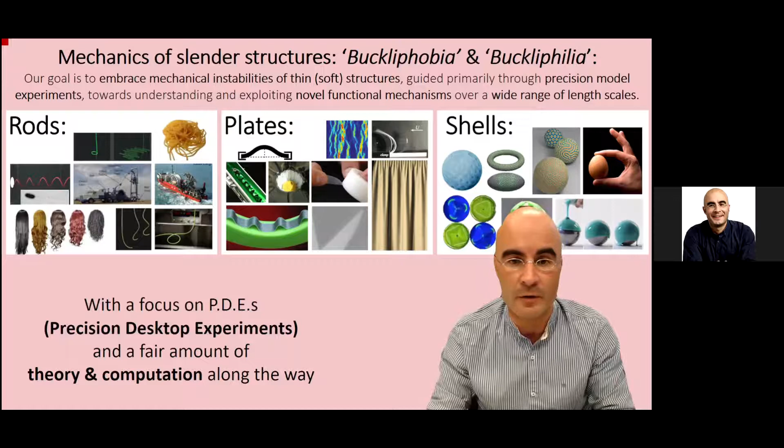Okay, so next, realizing I'm running a bit out of time, let me give you three very quick pointers of other problems that we won't talk about today.

Over the past few years, we've gotten very interested in magnetoelastic structures, structures that make use of the coupling between elasticity and magnetism. Many different kinds of problems we've looked at in this respect. Here I'm showing an example of an actuated helical structure by the application of a constant gradient field that induces internal forces into this rod.

Another example, perhaps closer to applications, is a recent paper we had out on programmable metamaterials with stable memory, where we make use of bistability of shells and magnetic actuation to arrive at those systems.

Closer to engineering, we're very interested in how shells buckle. If you have a thin shell like a fuel tank or a radome, and you ask, given a certain load, when do they buckle? That's actually a very difficult question to predict because these systems are strongly sensitive to imperfections, so we've been focusing extensively on the role of imperfections in these systems.

I also like fluid mechanics very much, even though our emphasis is mostly on solids and structures. We do a fair amount of work on fluid structure interaction, especially in the context of flight, considering the structural aspects of flexible foils and wings in aerodynamic performance.

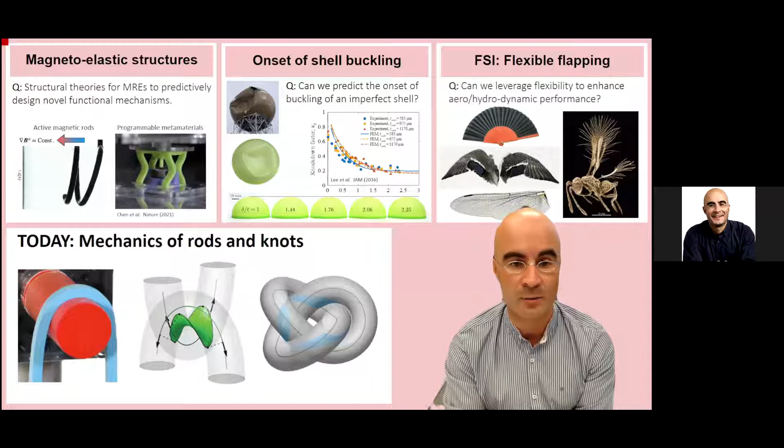Okay, maybe last slide of context. Why do we care about knots? Well, first of all, because it's a very challenging problem, and I do have a comment on what are the fundamental challenges in this class of systems, but they really matter.

But you might ask, well, we use them, who cares? A lot of the knowledge we have developed for these systems is primarily empirical. People have been using knots and ropes for millennia, and so we just know the do's and don'ts for these kinds of systems. But coming up with predictive models of the kind of work that you all do is a fair amount more challenging. So why do we care?

Well, they are very important for sailing, for climbing, for textiles, for belt-driven machines. And a primary drive that we are actively working on, by interacting with surgeons, is also the mechanics of sutures and surgical knots, and being able to come up with predictive models to inform assisted robots in semi-autonomous procedures. This is actually central to the PhD thesis of Paul Johanns.

And next, Paul. Okay, so maybe last slide before we get to fundamental challenges. There are really three primary ingredients that make these problems very challenging. The first is buckling. Buckling is an instability that happens when a thin structure is

loaded by a compressive load. As I was saying earlier, predicting the critical buckling conditions goes back to the days of Euler in 1744, with his famous paper on elastica. And the problems that happen past these critical buckling conditions are reconfigurations that are strongly geometrically nonlinear.

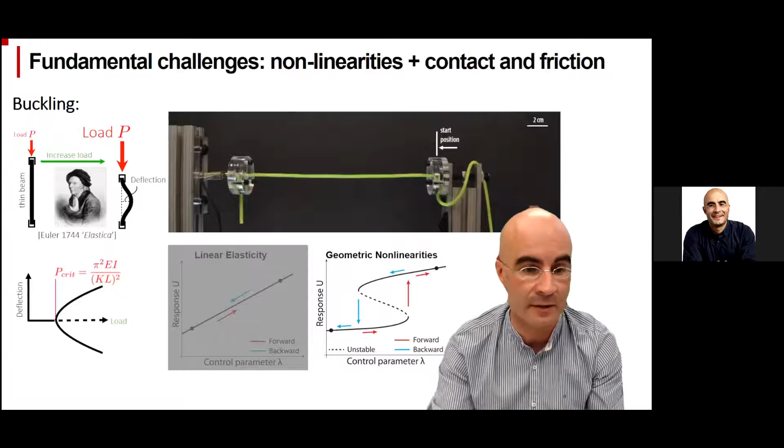Now, if you place this rod under compression, and perhaps add a little bit of twist, then you have buckling. But not only that, you can have multi-stability, coexistence of solutions with subcritical bifurcations. This is really caused by the underlying nonlinear geometry. These are the kind of things that really call for the full toolbox of nonlinear dynamics and nonlinear physics to describe these systems.

In addition to these geometrical nonlinearities, in many systems that involve rods, we have to deal with contact. Even without friction, that's already a strong hard nonlinearity. It's important to consider contact and friction, and even taking simple Coulomb friction, when you couple it with contact and geometrical nonlinearities, it becomes a full kitchen sink of nonlinearities that we have to deal with.

And when we have nonlinearities in this class of systems, unexpected things happen. That's why experiments are very important for us, because they allow us to jump into that jungle of unknown nonlinearities and uncover mechanisms that we then try to rationalize. So again, experiments take a primary role in setting the line of research.

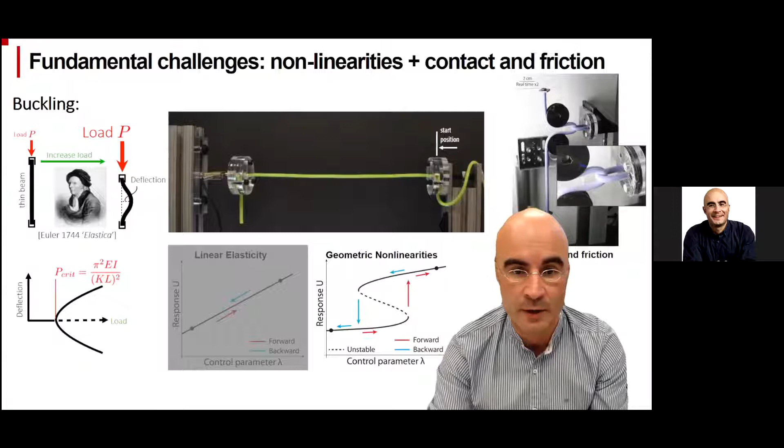Okay, so blah blah blah out of the way, let's get to the bulk of what we want to tell you about today. If you move on to the next slide, specifically on these rod-like systems, if we have a knot—maybe go back to the previous slide, Paul.

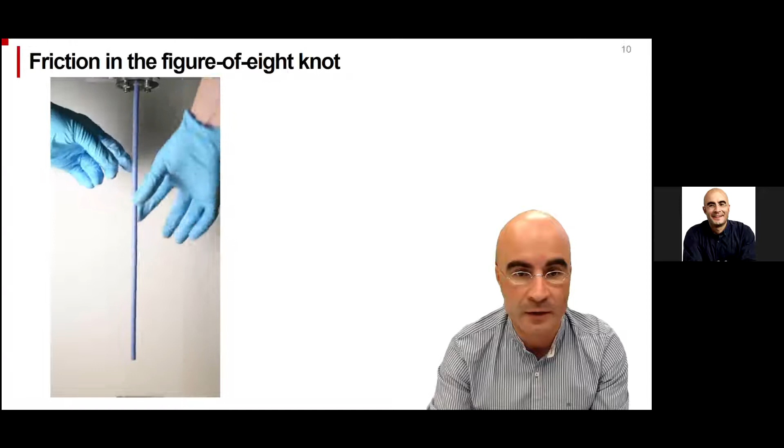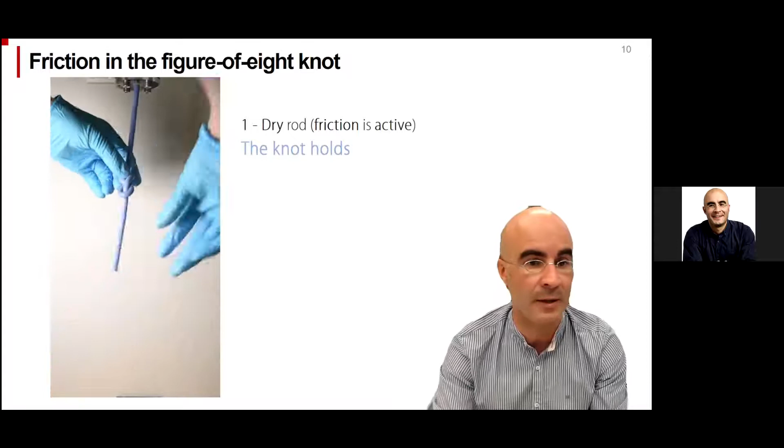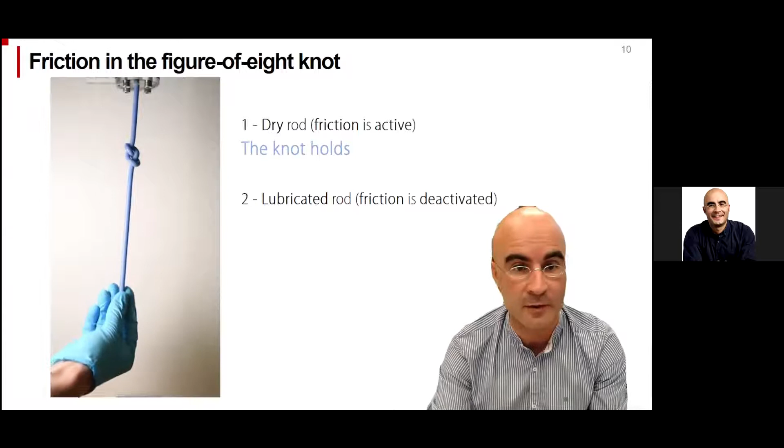If you have a knot that you tie and it holds because of friction—in these systems, I want to highlight with this video that Paul Grandgeorge produced that friction is crucial. Here, of course, the rod would like to be straight because that minimizes bending and gravitational energy, and friction induces resistive forces that prevent that. Now, if you lubricate this very same rod with the very same figure-8 knot, friction does not do the job it needs to do, and essentially the knot becomes undone because, again, that's the minimum energy state. These are the kind of ingredients we'll be dealing with for the rest of this talk.

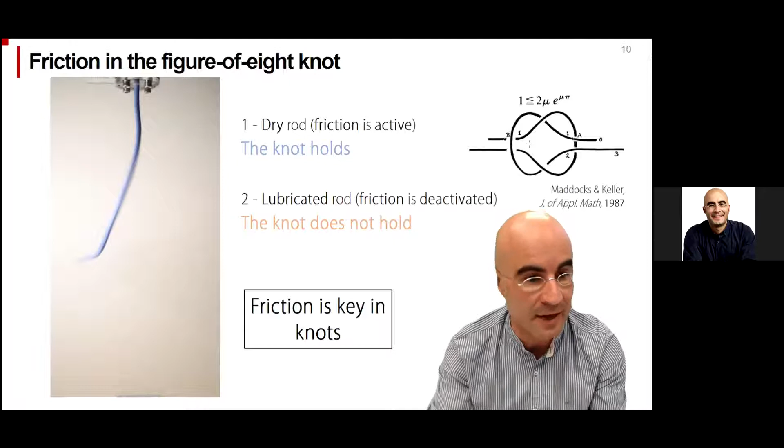So friction is key. Okay, very quickly, we want to highlight three specific projects today. First, the classic elastic capstan that Grandgeorge will modify in ways that were not really understood previously in the literature. And if you're not familiar with the capstan problem, Paul will give a brief introduction.

Then we'll ask, well, instead of having a rod wrapped around the rigid cylinder, what if the other element it's wrapped around is also flexible with tight curvatures? A very exciting study that we completed recently. We'll find that geometry is central to that problem. And then we'll actually go back to the applied math.

And knots community and ask how robust are some of these geometric arguments in real physical systems. Johanns will be covering some of that towards the end of the talk. So Grandgeorge, all yours now.

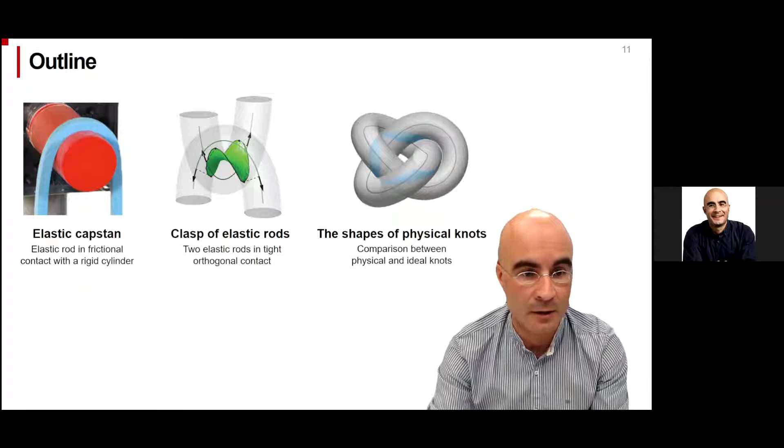Cool, thanks. Okay, so I will tell you a bit about this capstan problem that Pedro introduced in the elastic case. So maybe some of you, as a sailing country, as Portugal, you know a bit of the capstan problem because it's related to ropes and sailing in general.

So typically, the capstan problem is if you have a rope that is tied around a cylinder like this, the question is, what is the tension that you can apply at this end as a function of some lower tension that you're actually applying to the other end?

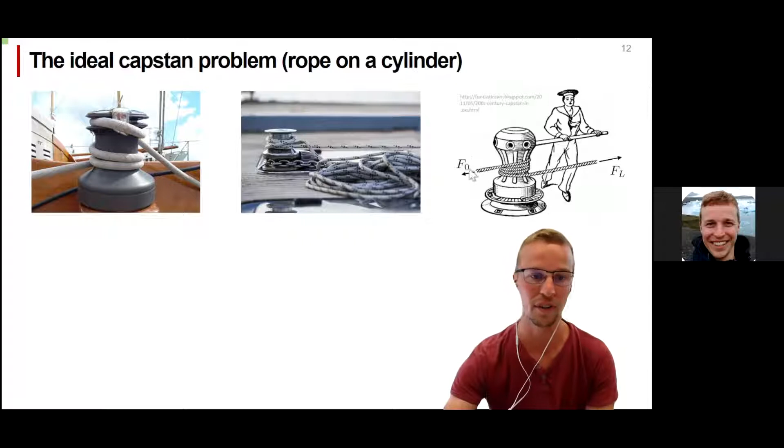And maybe a good representation of this is here. This is actually a capstan that allows you to wind the rope around the rigid cylinder. And again, the question is, well, what is the higher force as a function of the lower force that you're applying to the rope? And this is not only applicable to sailing, it's also for driving mechanisms.

Where you have a driving pulley that is through a belt generating motion to a driven pulley. And here again, you have a low force here and a high force here. And well, the big question is from a theory point of view in this kind of system, what is the ratio between these two forces?

And actually, if you take the limit of a perfectly flexible belt with no thickness, you find a straightforward relation between the ratio. So for the ratio of two forces, which is given by this exponential here of the friction coefficient times the wrapping angle around the cylinder here.

So here again, you have to take into account that there is sliding and you're asking what is the ratio of the forces. So we might think, well, this problem seems pretty well put and already solved from a theory point of view. But of course, there are assumptions to this that are, well, perfect flexibility and no cross-sectional thickness.

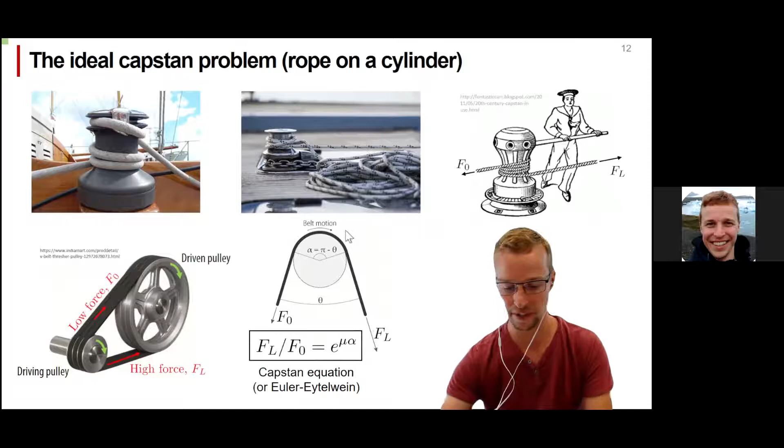So we thought, okay, but in real systems, well, the ropes, they might have some rigidity to bending. They might have some thickness compared to the cylinder of the radius. So the theory might not hold entirely. So we thought, okay, let's design a system where we can actually measure the ratio of the force.

We have a rod here that's made out of a very elastic polymer and is wrapped around a rigid cylinder. We hang a mass here that will be this dead load, so the small force. And then as we pull the cylinder up, as you'll see in a minute, we will measure the force that is being applied at the other end. So really, we're probing what is the load transmission along a rod when it's sliding in frictional contact with this rigid cylinder.

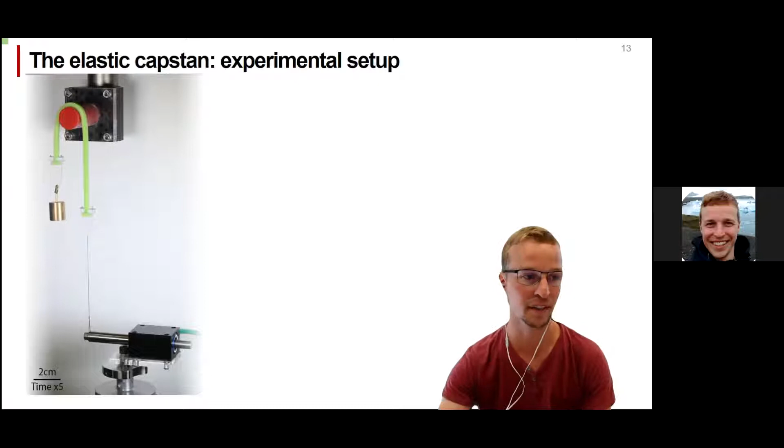So you saw the video, and this is the type of force curve that we obtain, so force versus displacement. And you see here, well, this is actually the low force that I'm applying, and this plateau force here, as soon as sliding is happening, well, this is the higher force. And you see, well, they're not equal because friction is generating tension increase.

And actually, we can represent this ratio here that I'm interested in, the higher force divided by the lower force, as a function of the loading on the system. So let's say the lower force that is here normalized by the typical axial stiffness of the rod. And we can do this for several dead loads, and we obtain actually a complete curve that tells us how the system transmits the load as a function of how much it is loaded by this dead load, F0.

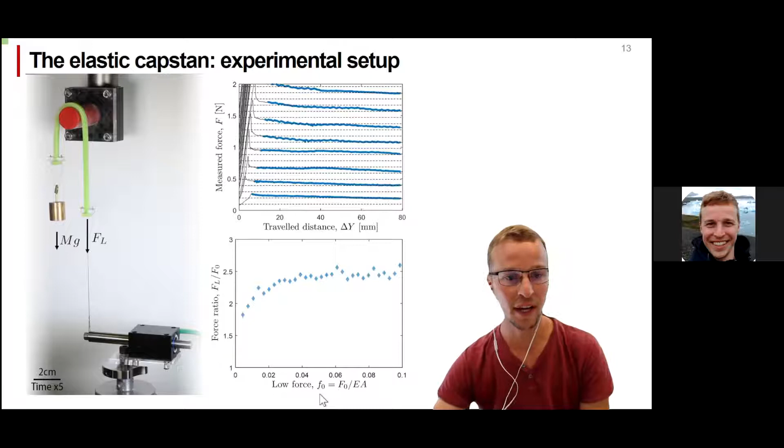Okay, and so, of course, we directly want to compare this with what finite element method would tell us. So here, I'm just going to show you a quick video of how we can do this with finite element.

So this is actually, the computations have already been performed, and you see here there is a cylinder and a rod wrapped around it. And actually what I'm doing now is I'm rotating this cylinder in this direction. And so you see that there is some frictional, you don't see it, but there is some frictional interaction here.

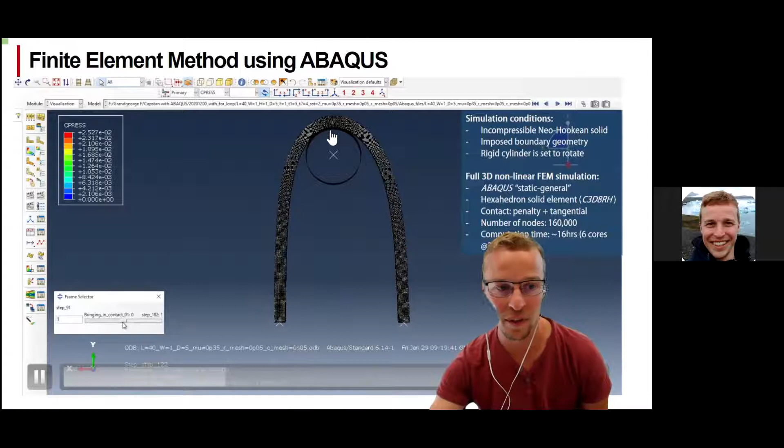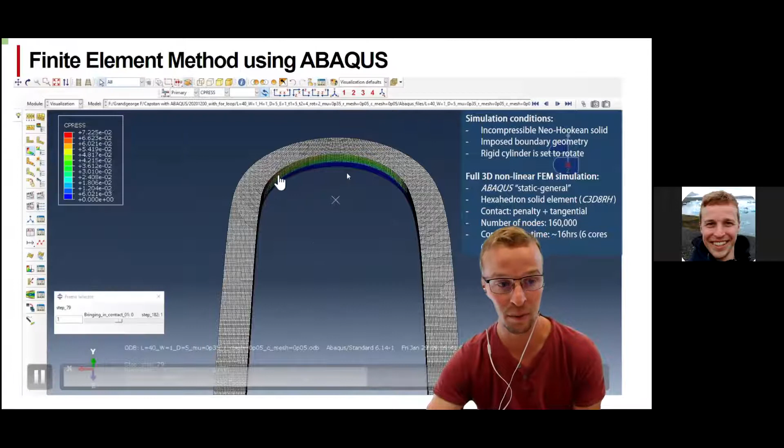The question is, how does the force transmit through the rod? Everything is dictated by the contact region. What we're surprised to see is that if you look at the contact pressure between the rod and the cylinder, it is strongly inhomogeneous. There are some regions of higher pressure, at the entrance of contact, there's much more pressure at this location than somewhere else. So even though the system looks rather simple, it shows some non-trivial behavior locally.

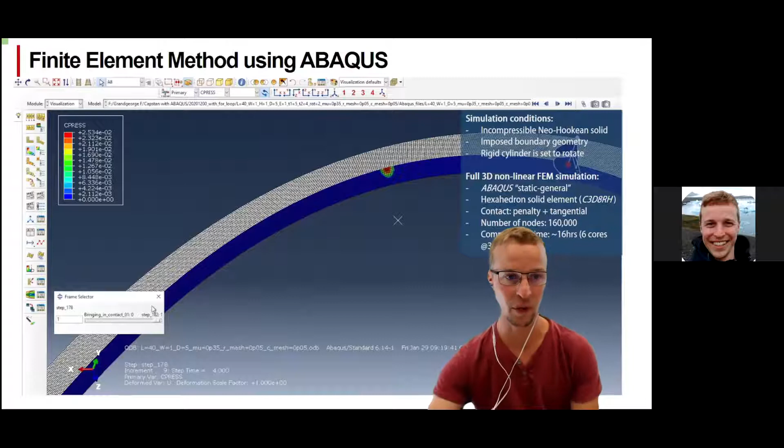We can do this for d equal 10, for a smaller cylinder d equal 5, and we can go even smaller, down to where the thickness of the rod is equal to the diameter of the rigid cylinder. There is a theory existing for this, the classical Capstan analysis, the classic Capstan equation, which has some assumptions underlying it.

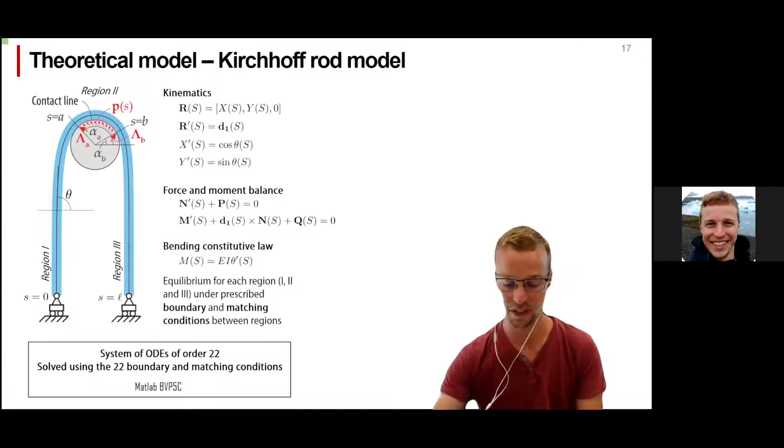We wrote the equations related to kinematics. We apply a force and moment balance locally at each location of the rod, then use a constitutive bending law that relates the moment inside the rod as a function of its local curvature, theta prime here. If we do this, we end up with a big system of ordinary differential equations that we can solve using the MATLAB function BVP5C, which is actually very robust.

So we get this purely theoretical curve, with no adjustable parameters, and we can compare this with the FEM results I showed earlier, where we also quantify tension along the rod. You see that theory does a fairly good job at predicting what FEM actually tells us is happening exactly.

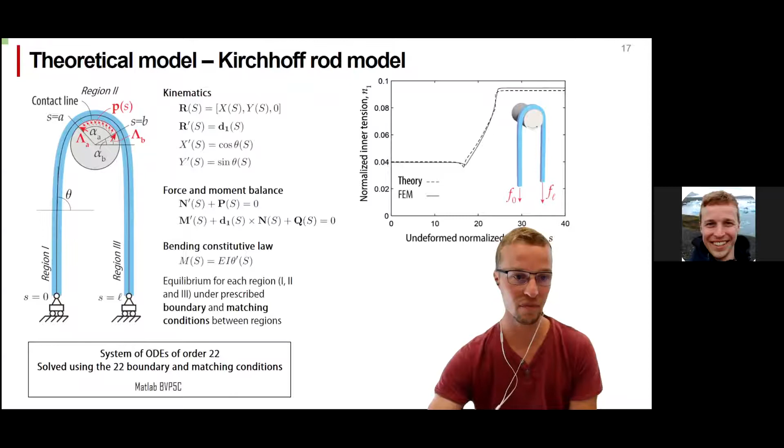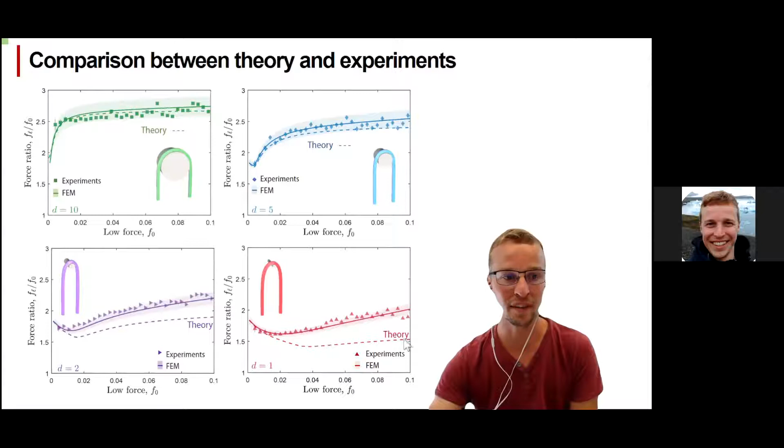Quick summary: theory is satisfactory for large enough cylinder diameters, because curvatures are not that extreme there. But theory is limited for smaller cylinders, as the induced curvature creates finite strains that are no longer within the elasticity theory of the Kirchhoff rod theory.

So, good in some regimes, not so good in others. In the region where the thickness of the rod is of the same order as the thickness of the cylinder, this is actually very relevant to knots, because knots are nothing but an entanglement of rods in contact with one another, so curvatures are pretty extreme. This is what we'll move on to next: how can we describe the mechanics of knots when curvatures are that extreme?

For this, I will let Paul Johanns tell us about his beautiful shoe here. There's a lot of interesting things to say here. Right, thank you so much.

So yeah, indeed, this is the classic square knot, the classic knot you would do in your shoelaces. What you can see is that this is a very tight knot. What does a tight knot actually mean? Well, the diameter of the filament and the characteristic radius of curvature are of the same order of magnitude, so existing theoretical models would not work anymore for these tight configurations.

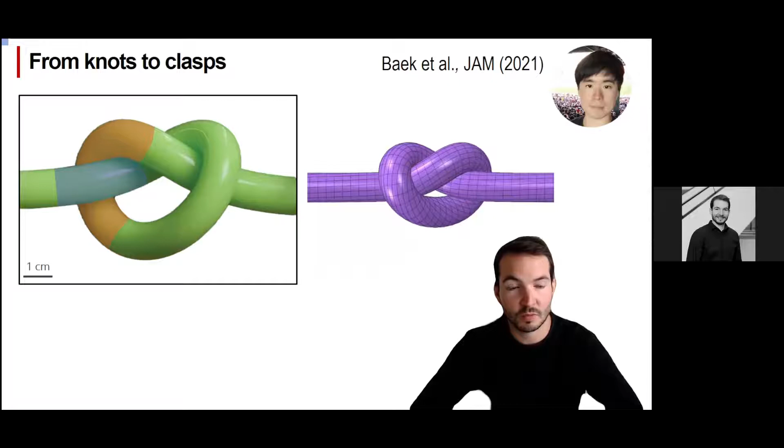This is actually something where we can break the knots down and make the problem hopefully a bit easier. This leads us then to the next main chapter, where we will talk about the clasp of elastic rods.

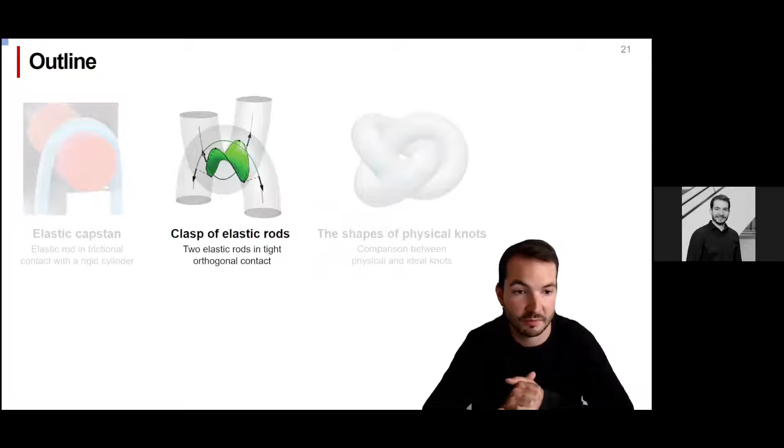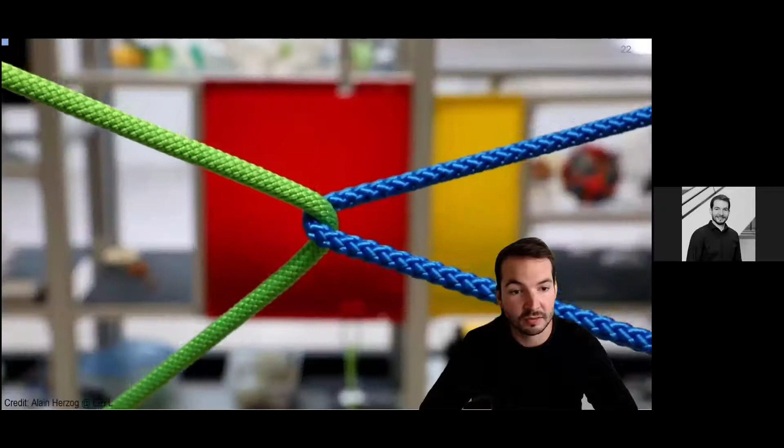We call this a clasp when we have two elastic rods that are in tight orthogonal contact. The system is actually quite easy, or looks very easy: you have two rods, two ropes, two filaments in tight contact with a certain opening angle. But now we will look a bit closer, and we will see some very surprising facts about this.

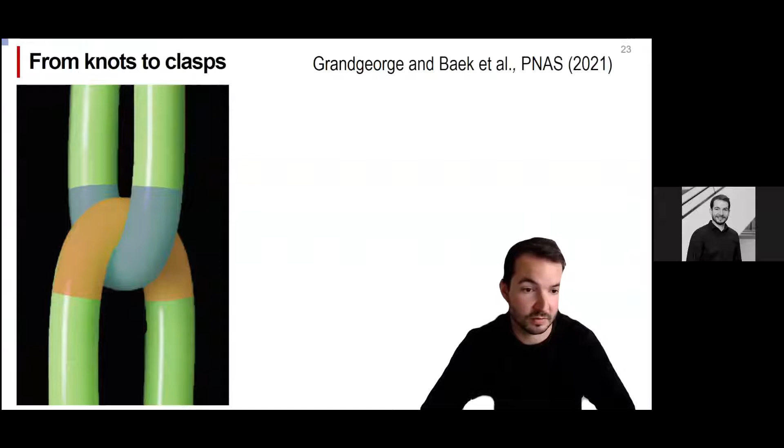So what is a clasp? Well, you have it here on the left-hand side. It's a model system of two rods that are crossed orthogonally, and we use hyperelastic material—these elastomeric silicon polymers. What we impose is a rod length, diameter, boundary conditions, and we'll also make it slide and measure the friction. This was detailed very recently in the paper by Grandgeorge and Baek et al.

We'll go now through the main points of this. So the main goal is to characterize, or get some understanding about, the contact mechanics and the load transmission for these orthogonal clasps with friction involved.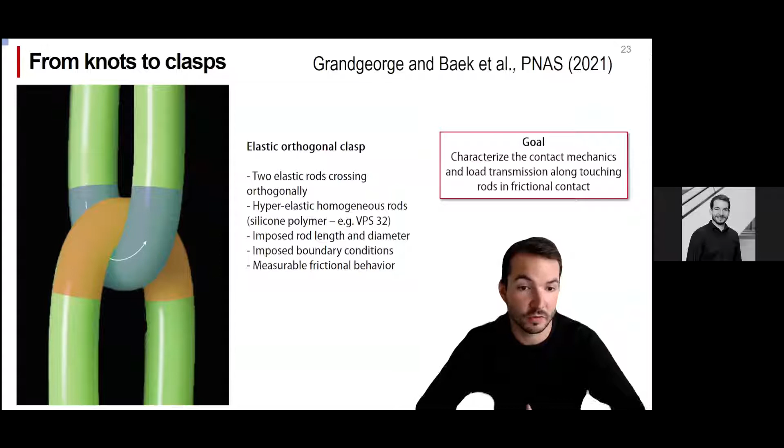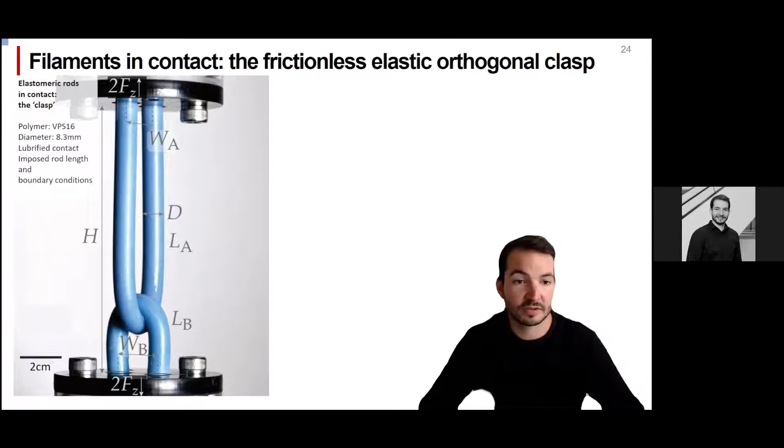So here again, the model system—you can see various parameters that we could change. What we are most interested in is the contact region, where the two rods are touching, but obviously we do not have direct sight on it. So we would need non-destructive volumetric imaging to get access to it, and we actually do that with our micro-CT, which stands for microcomputed X-ray tomography.

You can see here a volumetric image of this clasp configuration. It's still just seen from the outside, and in a moment we'll go see what the contact region looks like.

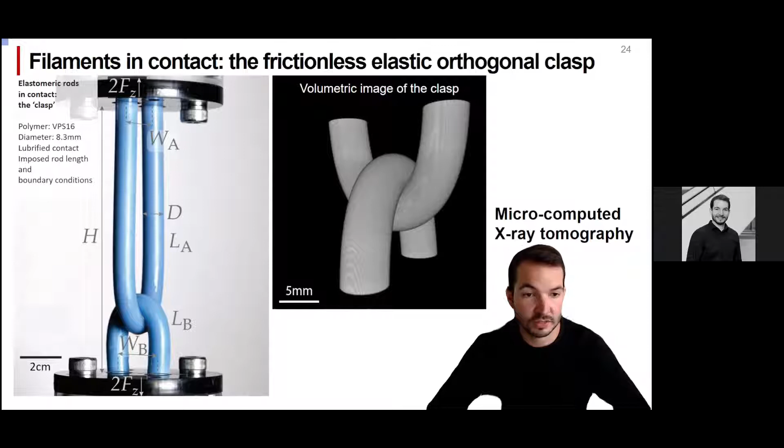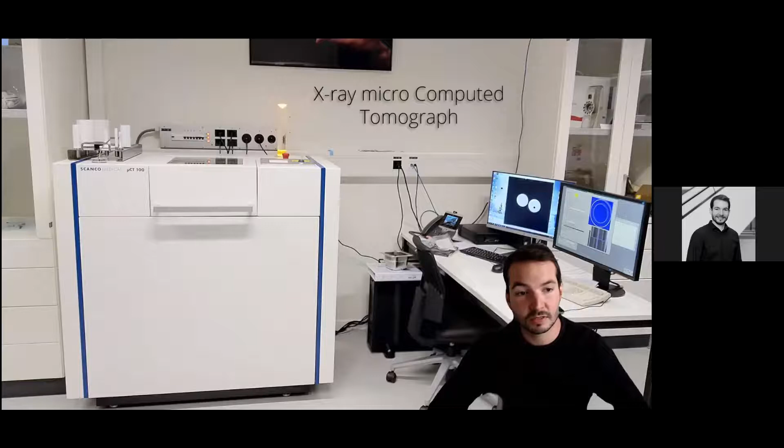But before that, let's go to the imaging lab, and I will show you again our micro-CT, where we would put, for example, a knot or an elastomeric structure inside. I guess you're all familiar with the principle of a micro-CT, but I will detail it again.

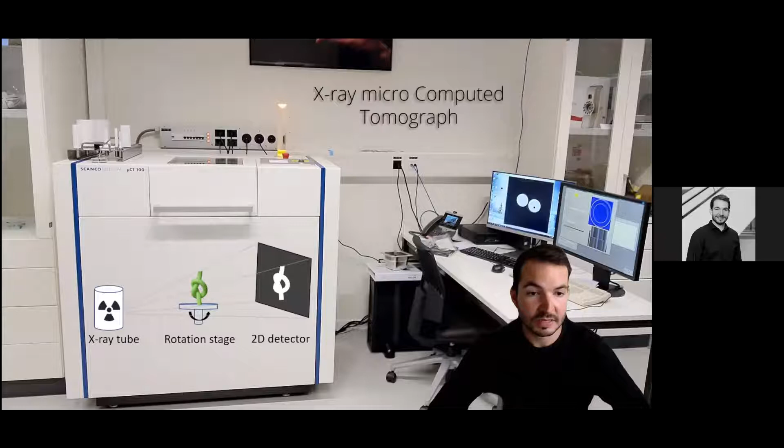We take this knot down to a rotation stage, and it is now being irradiated by X-rays coming from the X-ray tube. In the end, we would end up with a whole stack of 2D images that are based on density differences. So let's do that for this figure-8 knot.

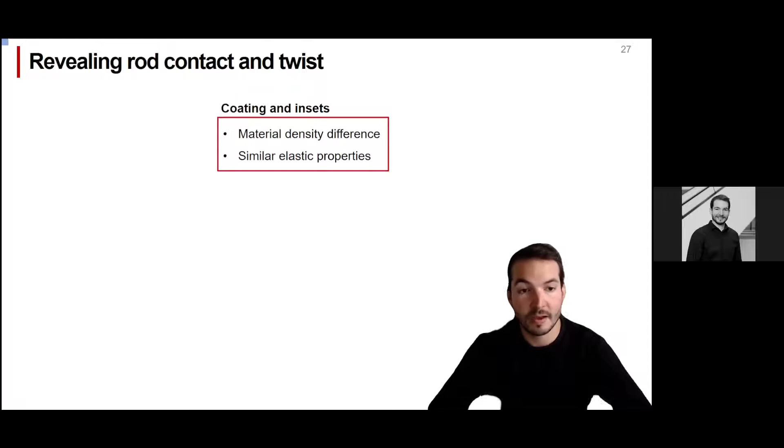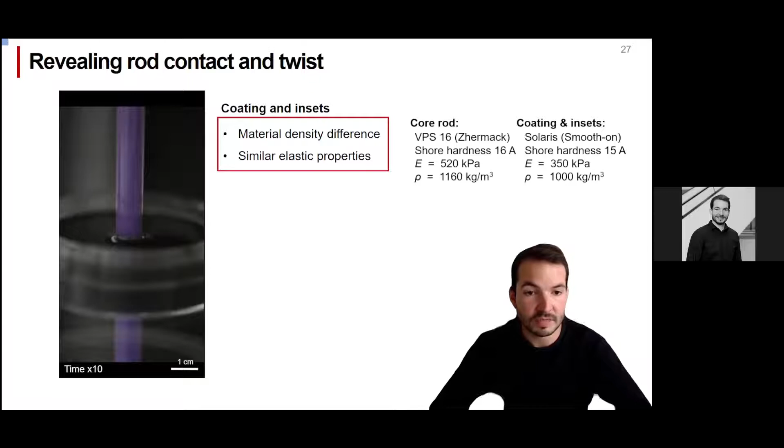So we have to come up with some technique in our fabrication of the rod, which is a coating, and will also include some insets. We're using another elastomeric material that has a different density. On the left-hand side, you can see this dip coating, where we pull our elastomeric rods through a polymeric bath with a constant velocity and end up with a uniform coating thickness. This material should have similar elastic properties, so as not to alter the overall mechanics.

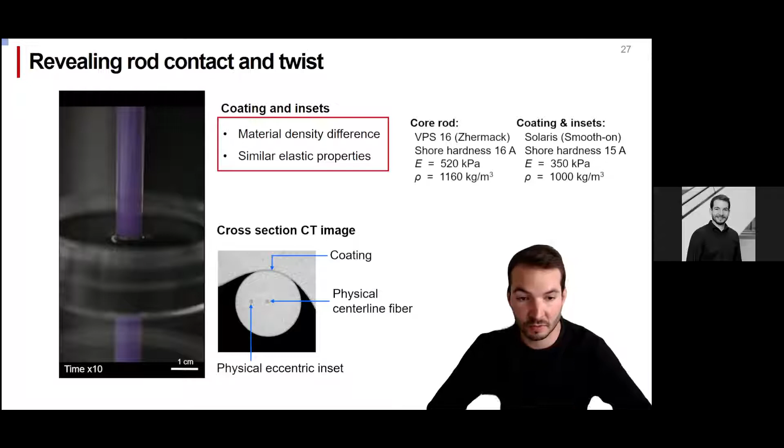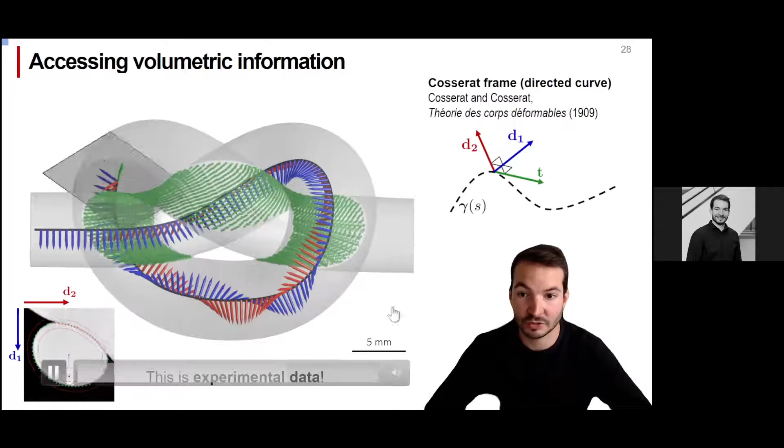Right, so here we do some image processing of this CT data. This is the overhand knot, where we go through with a triad having a tangent vector and two director vectors. One of these director vectors is used to track the twist. On the bottom left you can see the material frame, which is what we see on that plane iterating through the knot. I'd like to emphasize that this is actually experimental data that we can now use to describe the clasp. I'll give it back to Grandgeorge to use these tools on the clasp configuration.

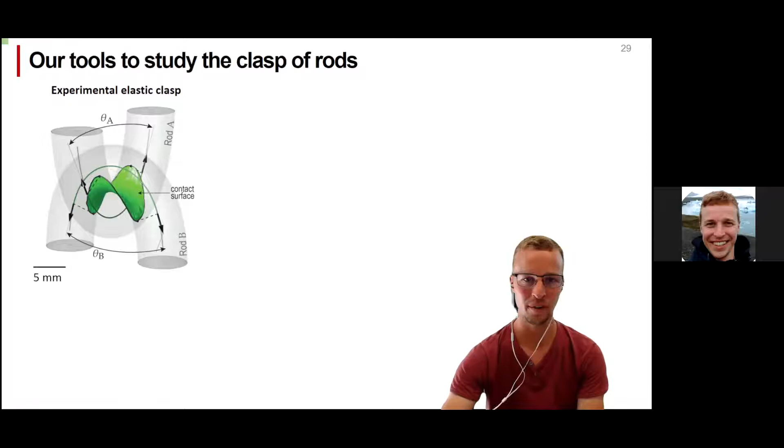Great, thanks. So I'll tell you a bit more about this clasp, which is a more evolved system close to the capstan. How will we study it? We'll use the experimental analysis that Johanns just told us about. We'll also do some FEM on this. And finally, I'll tell you about a mathematical, purely geometric system that allows us to study this more as a conceptual idea and really understand it more fundamentally.

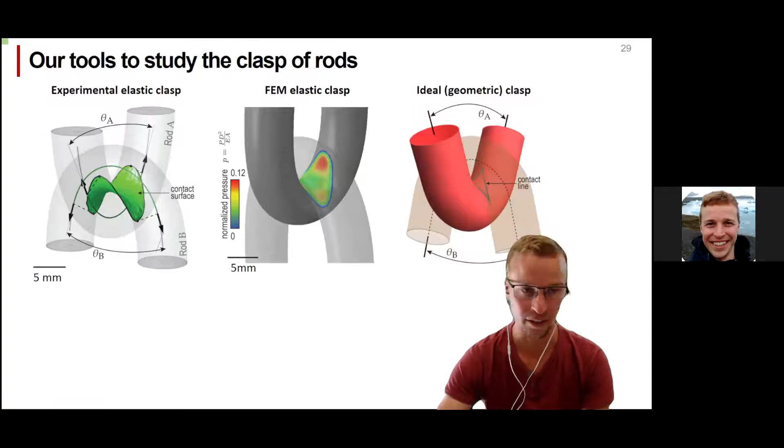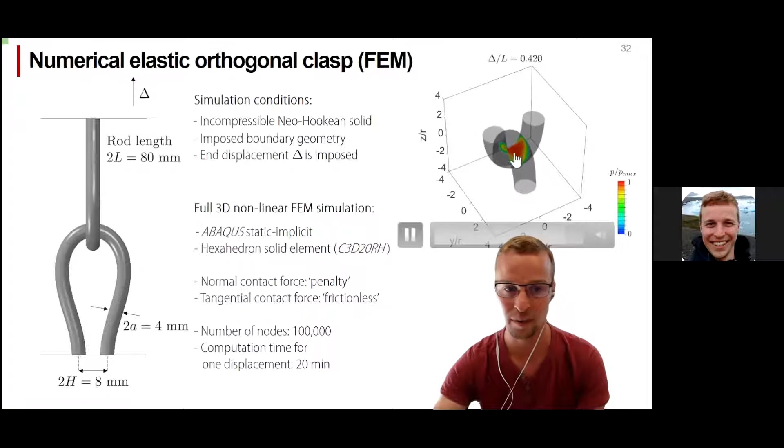Now how does this contact map look like when we use FEM? Well, if we do FEM on this, we use a neo-Hookean solid to represent the VPS. This is what we'd obtain as we pull the two rods apart and increase the contact region between the two rods. So here I'm pulling, and you see the contact region. We don't only have access to the contact shape, but we also have access to the contact pressure between the two rods, and this contact pressure is what I'll be telling you more about.

And finally, the ideal geometric clasp. It considers two perfectly flexible tubes, ropes that can perfectly bend. They're inextensible, have no cross-section deformation, and are called geometric because they have the geometric constraint of non-penetration. This was a collaboration with the LCVMM group, a math group at EPFL, led by Professor John Maddocks, who we had a really nice collaboration with. What they do is have two tubes in contact, and they compute the contact shape between the two tubes. Surprisingly, this contact shape in this purely geometric setting is not a contact area, but a contact line that has this diamond shape that you see.

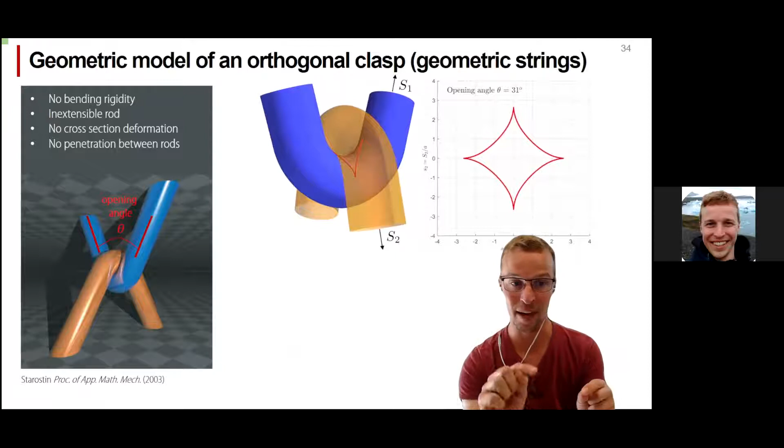So there is an air gap between the two cylinders as we tighten it. This might be surprising, but if you do it with your hands, you see that if you tighten your hands like this, you get an air gap between your two hands. So if it works with your hands, it might work with cylinders. And this is actually the case.

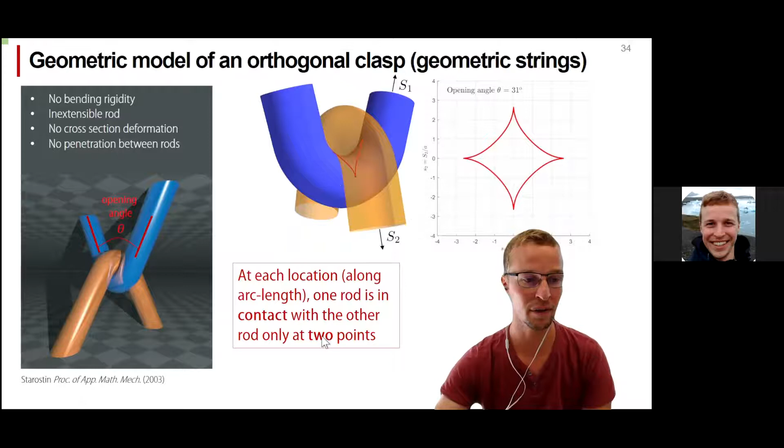At each location along one arc length, the other rod is in contact at 2 points. I'll try to hurry up a little bit and tell you about the results.

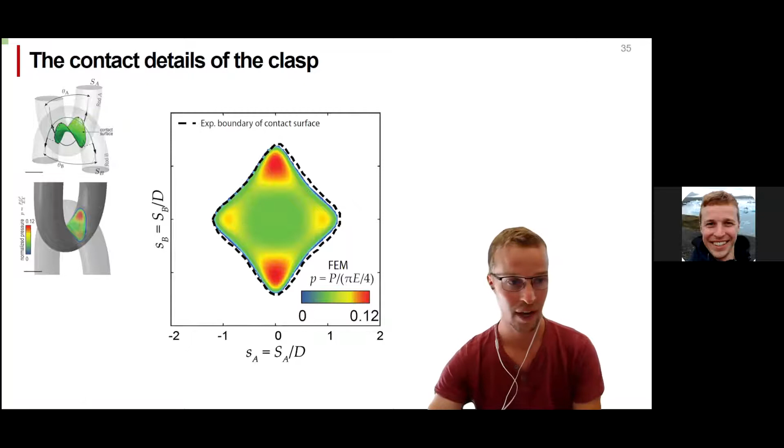And we see something surprising: it looks like there is some sort of ridge that connects the 4 peaks here. This ridge we can actually quantify based on the 3D view of the pressure map, where we see a ridge that we can quantify very clearly, represented here as a blue line.

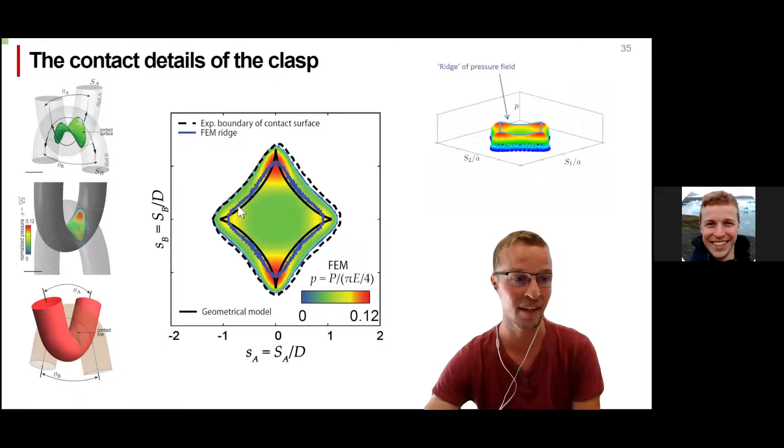Finally, we want to compare this with the mathematical geometric system. If we were to take the same opening angle between the two rods, this would be the diamond-shaped contact line that mathematics or geometry predicts. It's actually a good surprise to see that the pressure seems to be dictated by purely geometric arguments. So geometry acts as a backbone for the contact pressure.

We decided to also have more insight into the frictional properties of this clasp. So we have here a sliding rod that is in contact with a static rod attached to the wall. And this is of course the clasp.

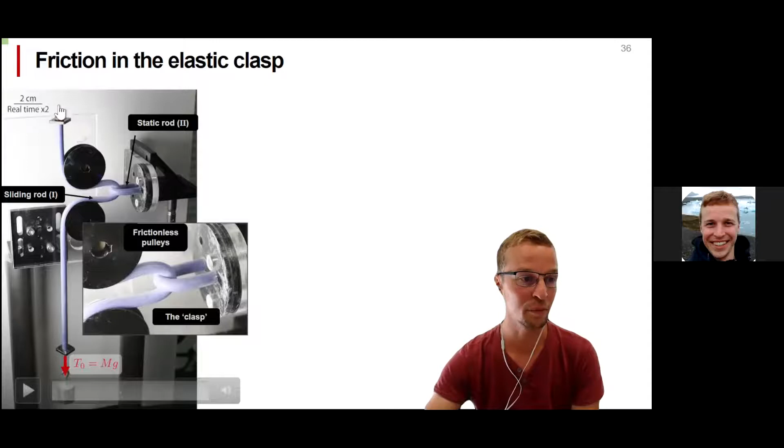There again, thanks to frictionless pulleys, we're going to apply a tension at one end whilst pulling at the other end and quantifying the force at the other end. So this is what the experiment would look like. You can feel or sense that the tension in this strand is higher than this one.

How the force gets transmitted is very important for the applications that we talked about, typically knots that are nothing but, yeah, exactly, a series of entanglements like this.

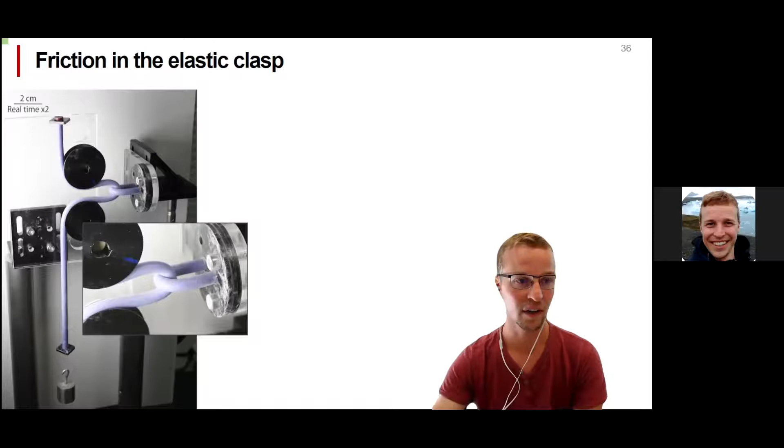I'll try to go quick on this, but we get the typical force displacement curves as well. Then we can do this for several configurations of the static rod and the sliding rod. Finally, we get that the force ratio I told you about earlier, as a function of the lower force, depends non-trivially on how you load the system. Interestingly, the more you apply a dead load, so the more the system is loaded, the higher the force ratio will actually be. So you transmit force a lot more when the system is under tension, and this is exactly because the two rods get more and more in contact through this intertwining.

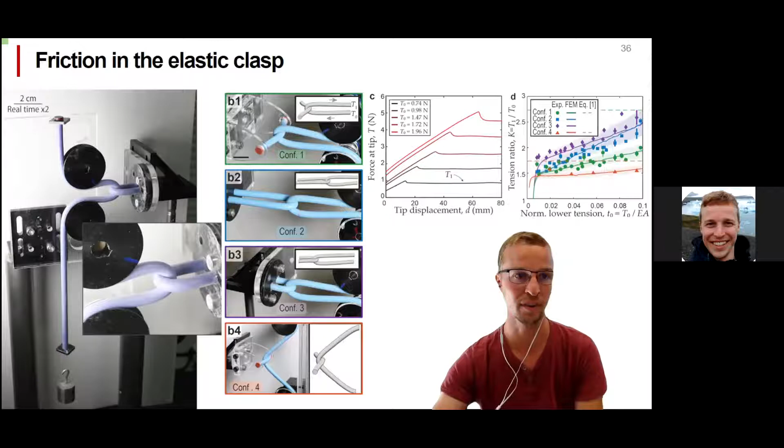We compare the obtained pressure maps based on FEM to the mathematical model that John Maddocks and his team developed, and we see a striking resemblance between the pressure maps observed numerically on the physical system compared to the ideal shape of the linear pressure of this contact line between the two rods. So this is just the beginning of more understanding of how pressure gets developed in these systems.

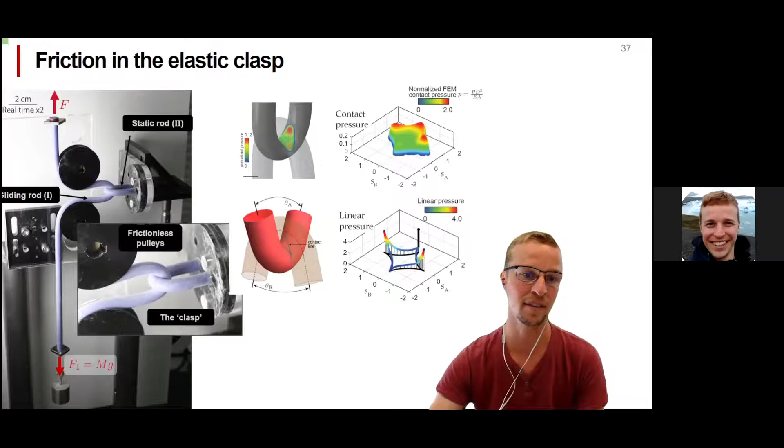Okay, finally, maybe Pedro, can you tell us what we'll talk about next? Maybe making a link between what Grandgeorge was telling us about adapting the capstan problems for situations with tight curvatures, when the substrate around which the rope is wrapped is also flexible, with friction and contact. We saw that geometry was really the backbone of these problems. And of course the question is: is it just a fluke, or is geometry that robust?

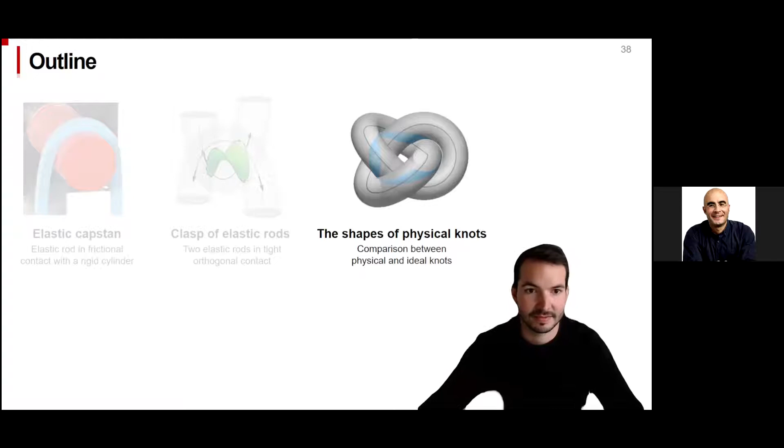And hence the latter. Johanns will now give you very brief notes on the very similar findings observed for the case of ideal knots. So we went to the ideal knot math community and tried to do some precision experiments to again check how much geometry is really ruling the whole game. So Johanns, very briefly, we're running out of time, so we have a couple of minutes and then we should really take some questions. Yes, right. So there are actually very few studies on ideal knot configurations, and mostly in the math community.

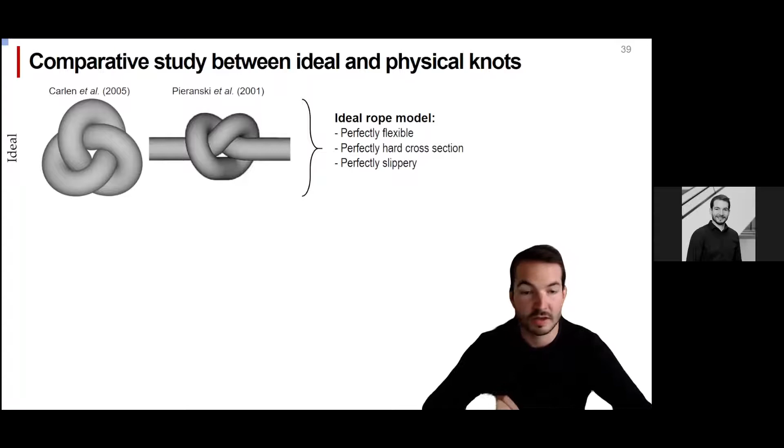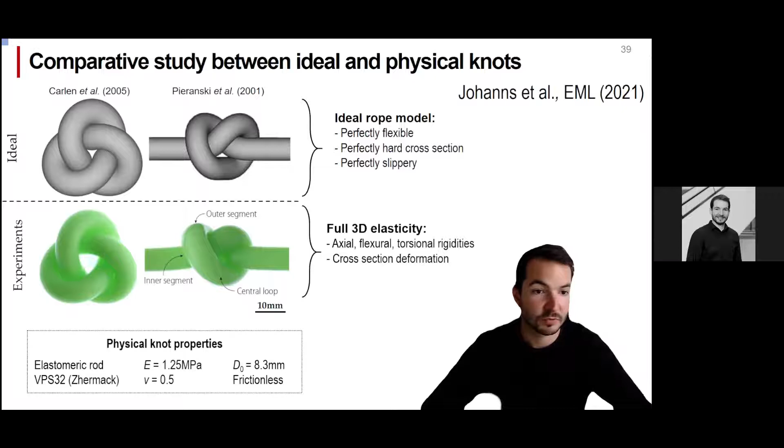So again, we have this ideal rope model, and we would compare or do physical realizations on our elastic rods, doing a compare and contrast study to see how well they perform. We have actually the full 3D elasticity, and let's directly jump to the open knot configuration, as it's a bit more functional, for the sake of time. So we can do this in simulations.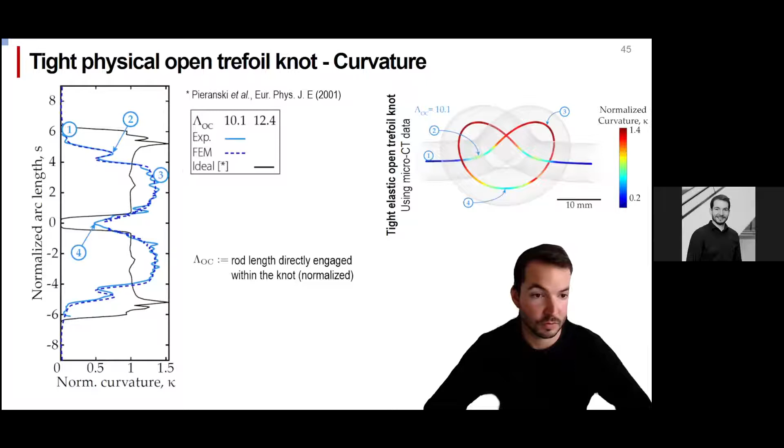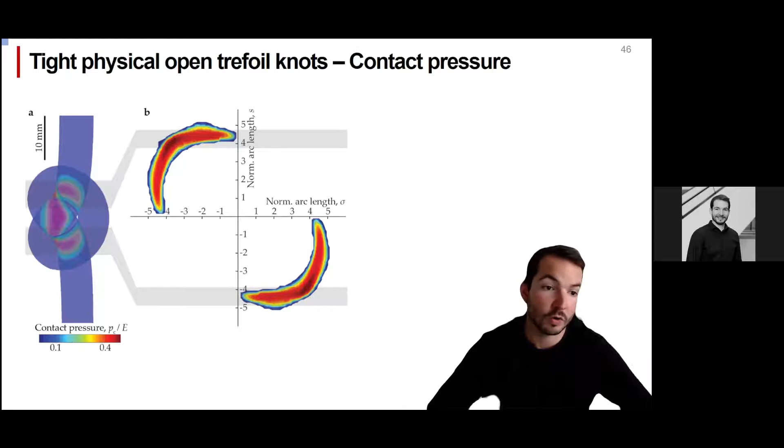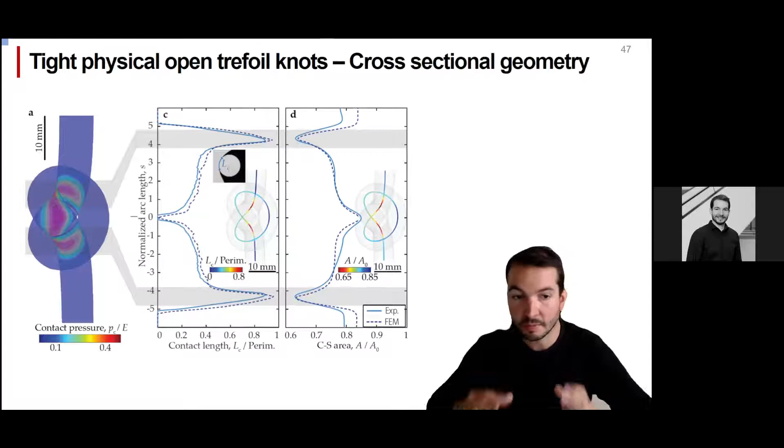Going further and analyzing the cross-sectional area at each cross-section, we can see that we have very pronounced constrictions right at the entrance and at the exit. Probably these elastic constrictions might be a precursor for structural weakening that are not captured by the ideal rope model. So we should be careful relying fully on the ideal rope models when dealing with purely elastic rods.

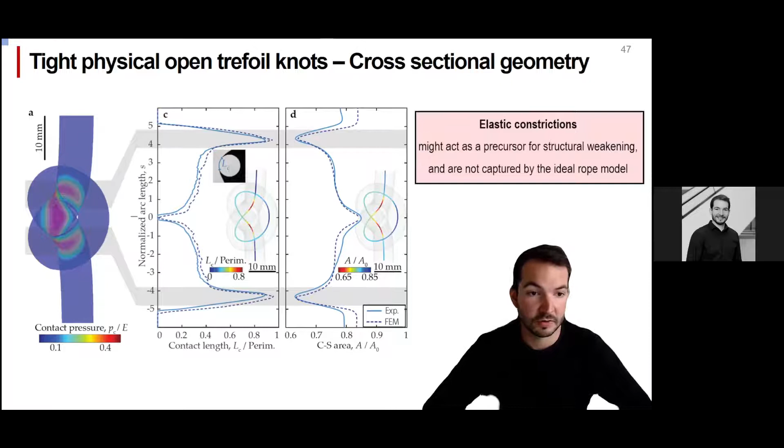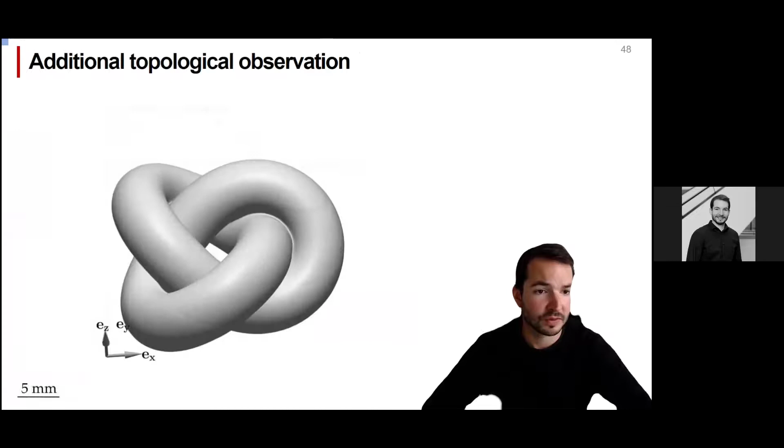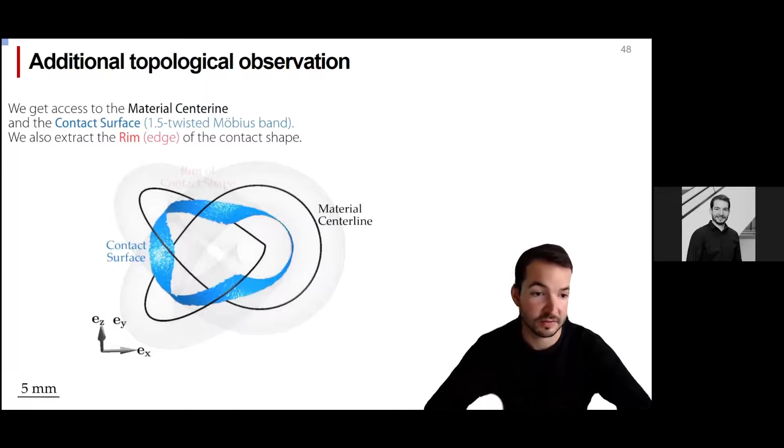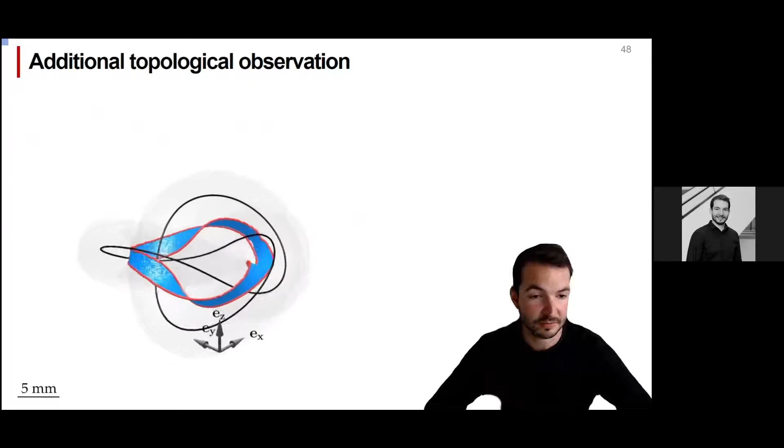Maybe the next slide, we have a little extra bonus where we show you a topological observation. This is the closed trefoil knot, nothing else than taking the open configuration and closing it. So we do the CT scan, this is experimental data, get access to the material center line and the contact surface. Now we take the edge of this contact surface, visualized by these red lines. It's actually only one line, and this blue contact surface is nothing else than a 1.5 twisted Möbius strip, which is also a nice fun fact.

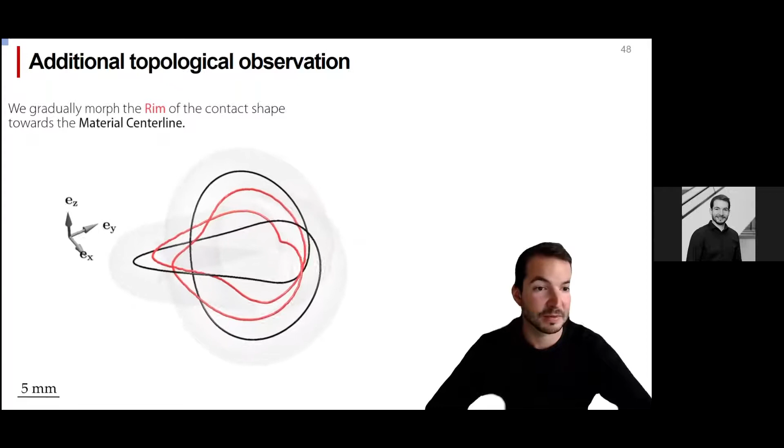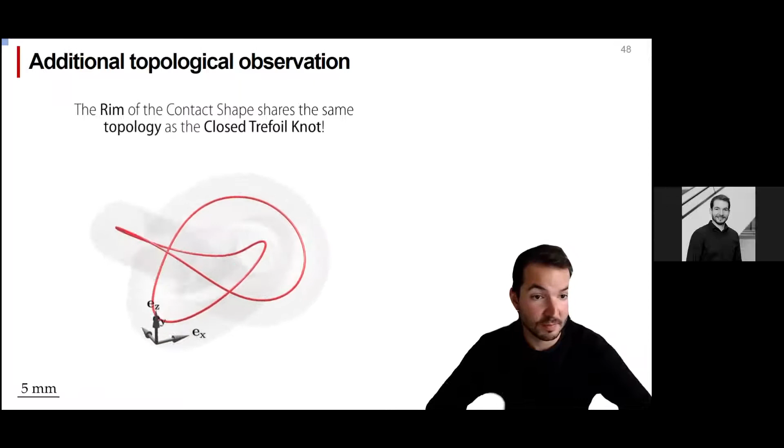Now let's morph this rim of the contact surface continuously towards the center line, and what we see is that this rim of the contact shape shares the same topology as the closed trefoil knot, which is, at least for us, a very surprising observation that was already observed for an ideal configuration where they have double contact lines a couple of years ago. We managed, by taking this edge of the contact shape, to observe the same thing in a physical configuration.

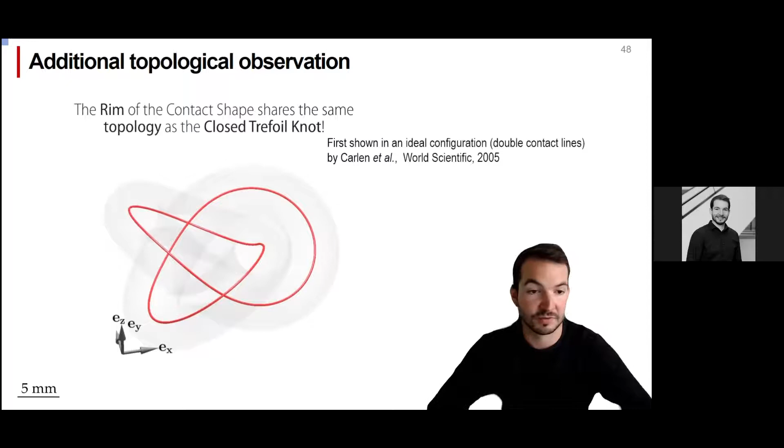And I guess it's time to wrap up. I will give it over to Pedro. Well, this is all we have time for today, maybe we can continue doing the Q&A next. So we showed you a series of problems where topology, geometry, elasticity, contact, and friction are really ingredients crucial to predicting the mechanics and cannot be ignored. At the moment, the studies we have completed to date are rather fundamental in nature. But for the work we have ongoing right now, for example interacting with surgeons to understand what's a high quality knot, how knots fail, we have to take all of these ingredients into account. And so I think we're setting up a basis for a toolbox to continue addressing problems that have to date just been driven by empirical

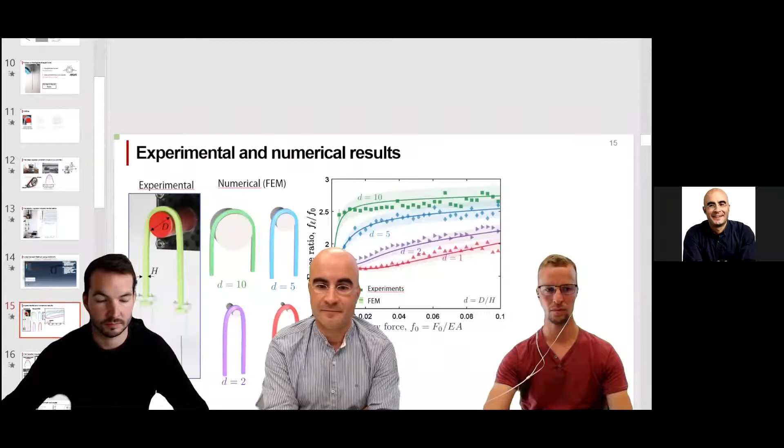Okay, Grandgeorge, I leave that one to you, you're the expert. So it is a really good question, I was surprised too, actually, at the beginning.

The theoretical prediction would be up here, and we see indeed that as the diameter changes, the force ratio changes. Actually, the reason is that it changes for the plateau regime as we go far enough into the loading regime. And the reason is rather surprising: if the rod has a thickness, then you're not only imposing a force at the surface of the rod, you're also inducing a moment that is distributed along the center line of the rod.

So this frictional force, because it's tangential on the surface, induces a moment. And actually, this moment fights against the frictional increase of tension. Through some steps in the equations, it becomes apparent, and it does depend on the diameter because that becomes an important parameter in these equations. So really, the key is that the moment fights against the tension increase.

And another interesting thing: the reason it changes so much, say for this green curve, why it's lower for lower loading, is actually because the contact surface or contact region is much smaller in the case of small loading, whereas as you start pulling on both ends really hard, then this interplay between geometry and friction as a function of loading is really what was interesting for us, because this hadn't been studied. It's always considered that you pull really hard, whereas in some systems you're not pulling that hard, and the contact region is smaller. So you might overestimate a lot what you expect for the force transmission compared to what's actually happening.

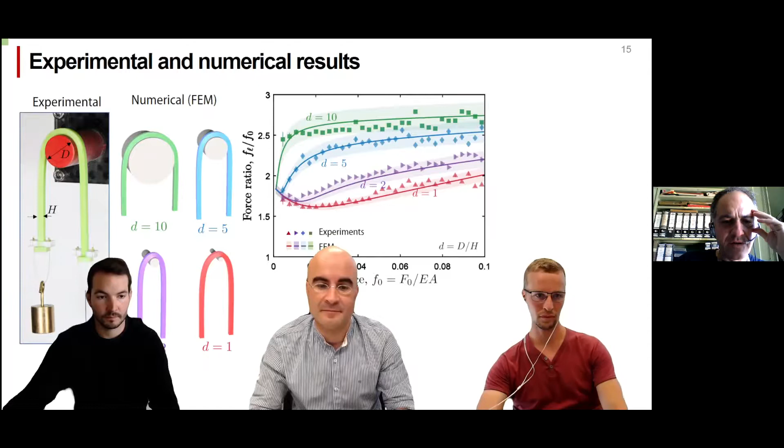If I understood correctly, you treat your materials as neo-Hookean solids—that is, in terms of elastic behavior, they're fairly conventional. Have you ever tried doing something with, well, one material I once worked on as a postdoc a few years ago, also at Cambridge, incidentally—liquid crystal elastomers, which are sort of fancy rubbers with very unusual and intriguing properties. So, who knows, someday you might like to try one of those.

Yeah, so we haven't played with active polymers like liquid crystal elastomers. What we have played with is magnetoelastic composites—rod systems that can be activated with magnetic fields. So maybe not as sophisticated as liquid crystal elastomers, but yes.

So what's the challenge in those kinds of systems? You have to go back to the drawing board at the level of the constitutive description to come up with the equivalent of the Kirchhoff equations for elastic rods that you saw, but now with additional terms that come from various field couplings. So magnetoelastic rods, yes, we have.

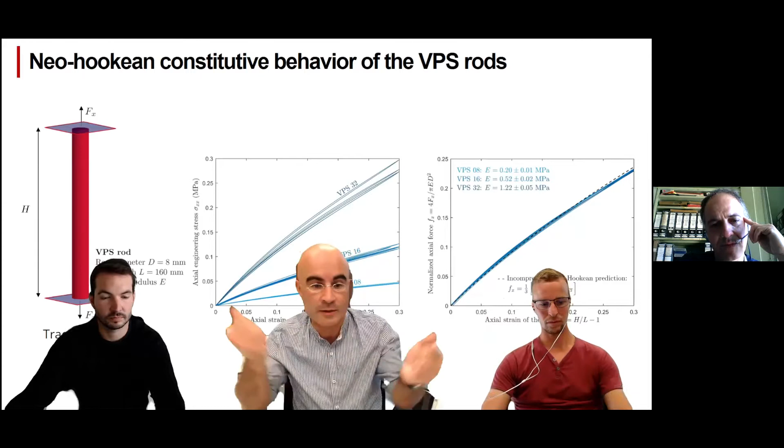More sophisticated, no. What Johannes can maybe comment on is what about when you have plastic deformation in these filaments—this is relevant for surgical procedures. Like fishing line, if you pull it too much, it will neck and break. Okay Johannes, I was getting going with the answer here—what have you done on plasticity?

Right, so basically we saw the frictional capstan, and very recently we started working on elastoplastic materials, and we could do a similar experiment. We would take a capstan, but then have an elastoplastic filament around it, and use an air bearing or ball bearings to really get rid of friction, and we would again measure a tension difference from one end to the other—not a tension ratio, but a difference. That's very interesting, especially if you think of combining these two: friction plus an elastoplastic filament, and what you could do with these ingredients of tension loss.

Yeah. Okay, thank you, very good. So I don't see any more raised hands here, so I think it's time to wrap up.